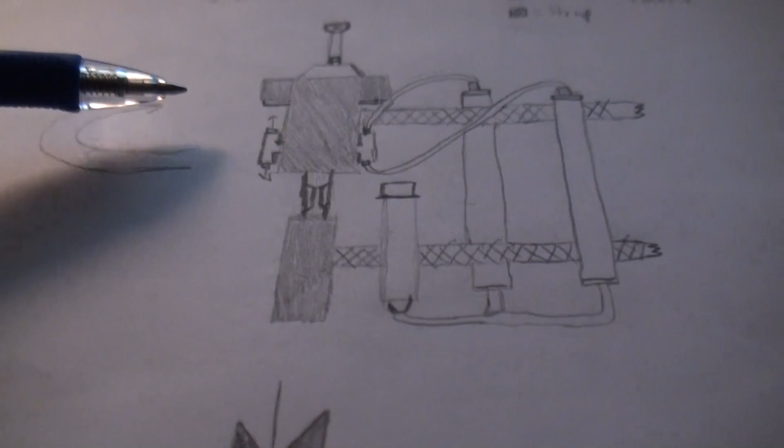So WDM 4.1 was basically just the fixed version of the WDM3, which is the one with the flask pressure vessel that I showed in the previous video I made on the web shooter, the actual physical one. That was called a small web shooter update, I think. But that was sort of the updated version of that.

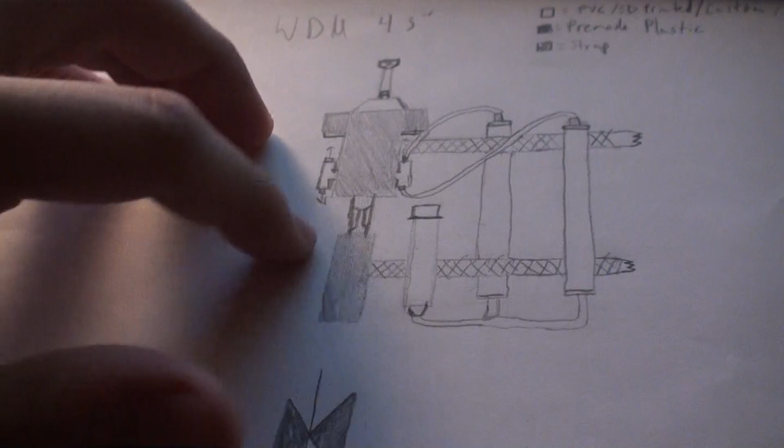WDM 4.2 was basically this main unit with these two parts here plugged, but then you would have one CO2 canister coming out of here with the fluid on top of it. So you'd have fluid, CO2, plug, plug, and then it would go up and shoot out. But that was very low fluid capacity, so I decided to go with this.

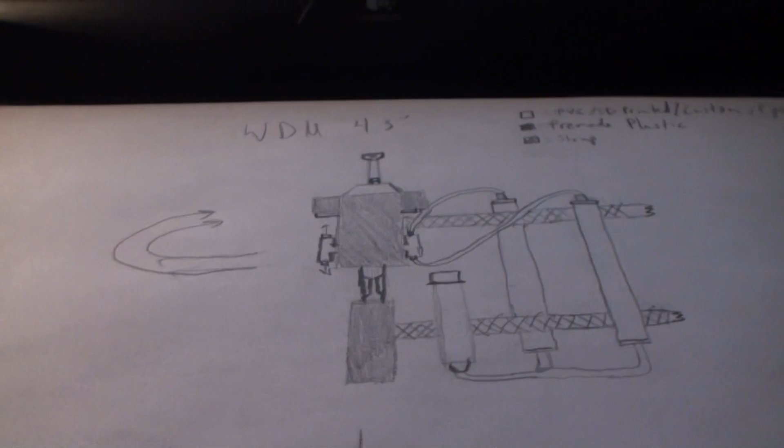This originally started out as a Scarlet Spider sort of thing, and it evolved away from that, and then evolved back into it, and now it's sort of in between a realistic and a Scarlet Spider design.

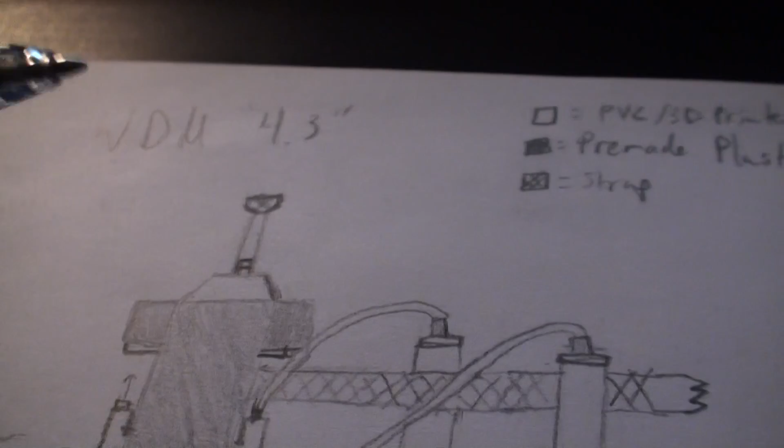So let's go over the different parts, just primarily what I need to and don't need to explain. So right here is the trigger, the wires, and the nozzle. I'm pretty sure they don't really need any introduction. The trigger is just a button, the nozzle is probably a barb fitting for the output.

This trapezoid here is just an extension that I'll have to build or 3D print for the main unit. This right here is what I call the main unit, and that's where the formula combination and the actual chemistry stuff happens. I'll show you the inner workings of this a little bit later.

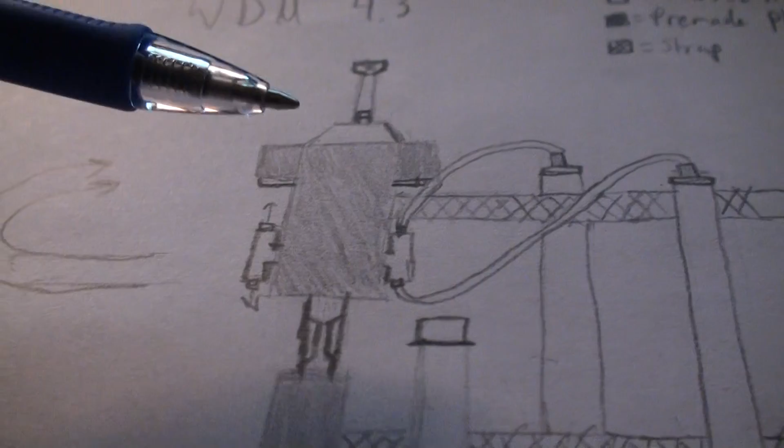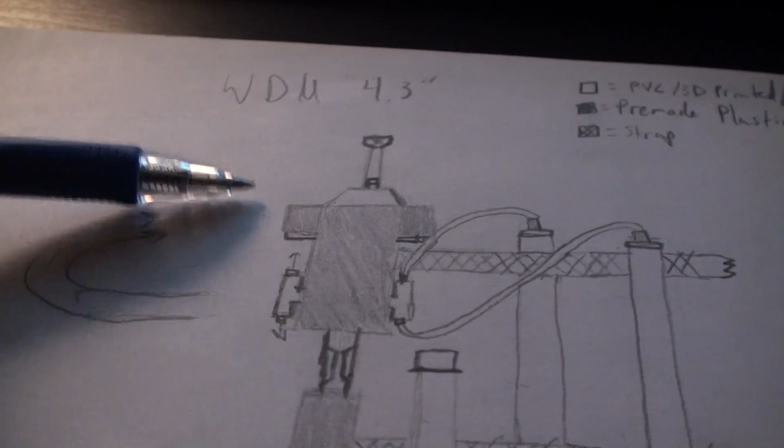It's on a separate page, but basically you can see there's two solenoids. I know we talked about the singular solenoid, but after I saw the issue with the one you sent me before, I started looking for some other ones and I could not find any. I think you said you couldn't find any either, so that would be an issue with the singular solenoid. I'm probably just going to end up using two.

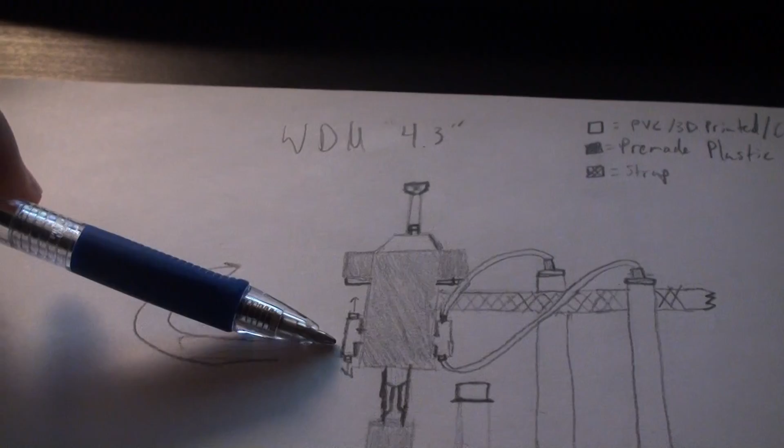But down here you have the two T pieces that come out of each side of this, and the point of these is to allow for two pressure vessels to go into it so that we can have more fluid capacity.

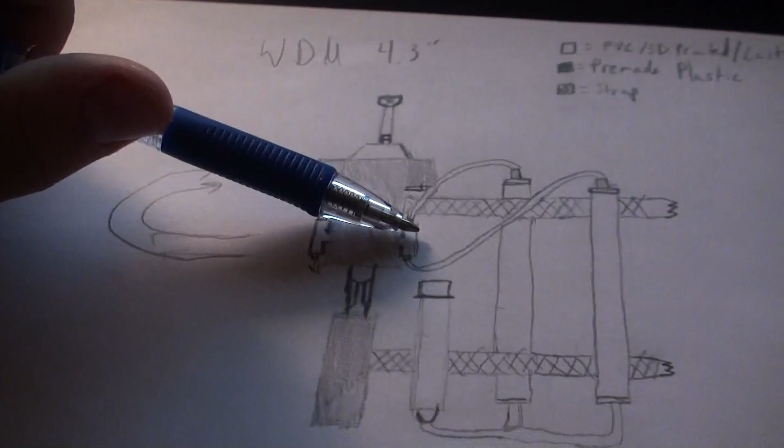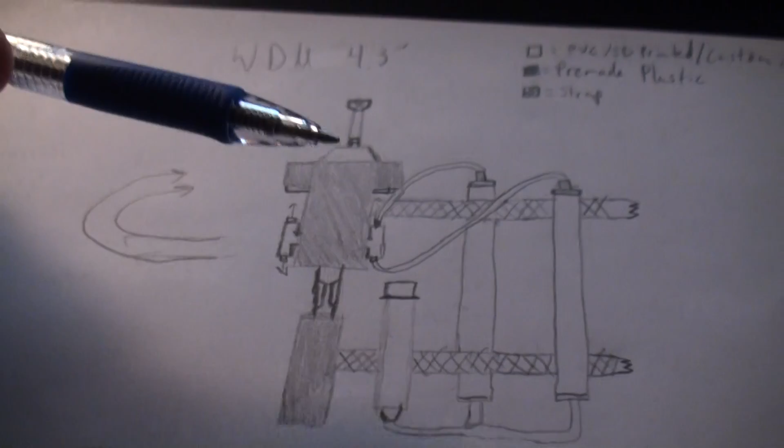Now the problem here that I originally had was that each of these was a cross piece, so there would be one more input here with one more pressure vessel. That was before I had this secondary unit here. So I had to condense the amount of fluid because I had to add this extra unit here, since these CO2 canisters were directly below this. But I had to move it over, which made it so there was less actual space for fluid.

But all of this in here is where the chemistry stuff happens and the final release of the fluid.

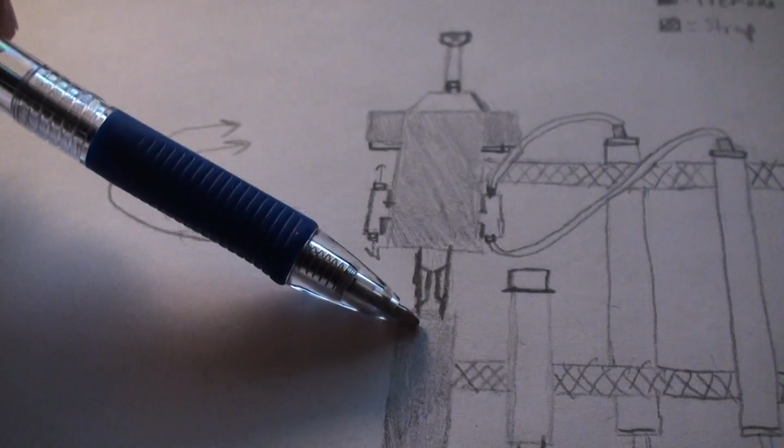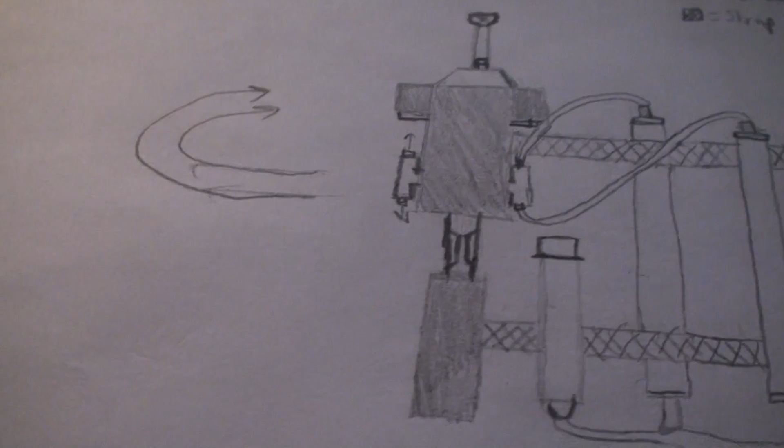Right here is basically a ribbon cable. I don't really know what I'm going to use. It's probably just going to end up being all the wires and such put into some heat shrink tubing. I wanted to do a ribbon cable, but then I realized that would probably be very high resistance and very low strength. So down here is where the batteries are going to go.

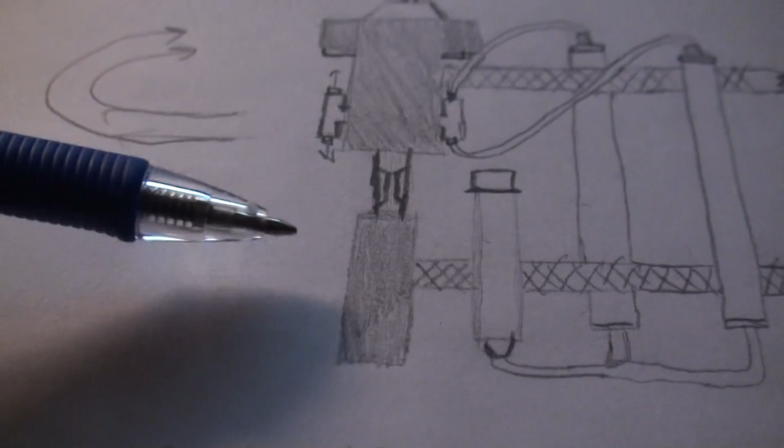Since we don't really know about the heating part yet, I will probably just be using the two 9 volts. As you can see, I have two rechargeable 9 volts here. They probably end up like this, since you have to have a clip for both of them. Now the problem here is that this is the length of the main unit, and you can see the problem - it's a bit longer, even.

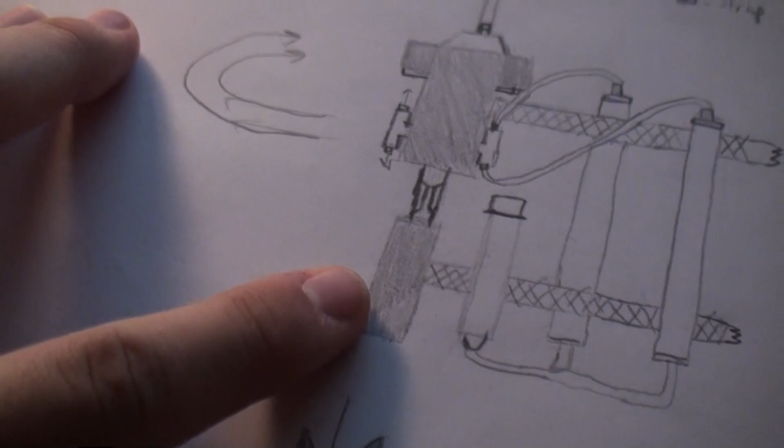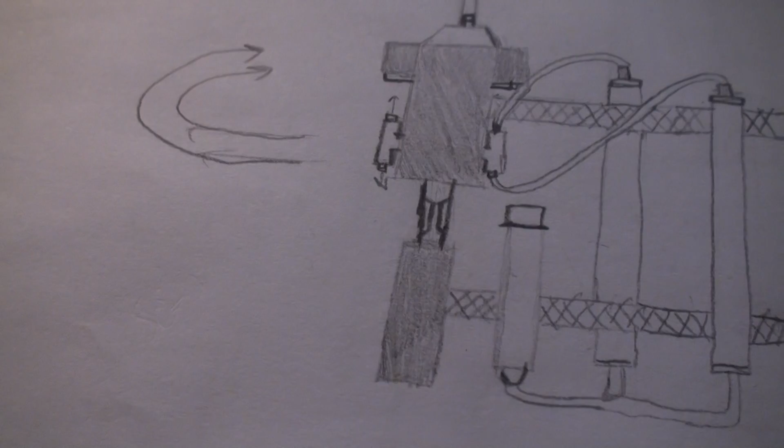Plus then, if we do the heating coils, we'll have to have more batteries down here, the small 12-volt ones, one or two, depending on the amount of nichrome or whatever wire we use for that. So I don't really know what I'm going to build for that. Plus, I'm going against using the new circuit for it - I'm probably just going to go back to using the microcontroller because of space.

So next, you see these sort of X parts here - that's just the nylon straps. What I wanted to do was take the nylon straps and weave them around the pressure vessels. So this right here is the CO2 adapter.

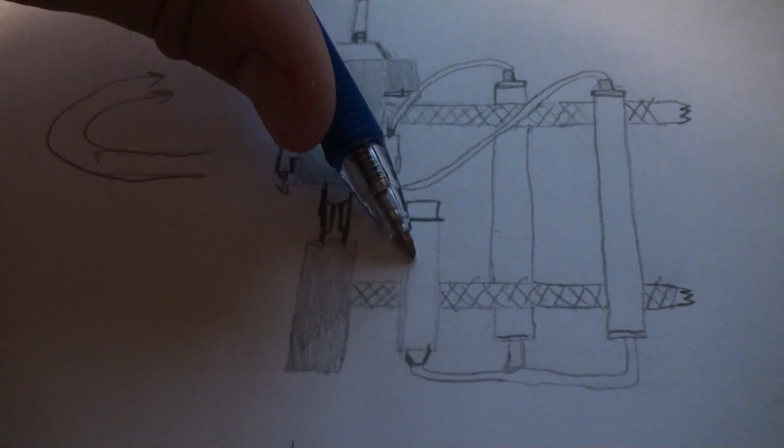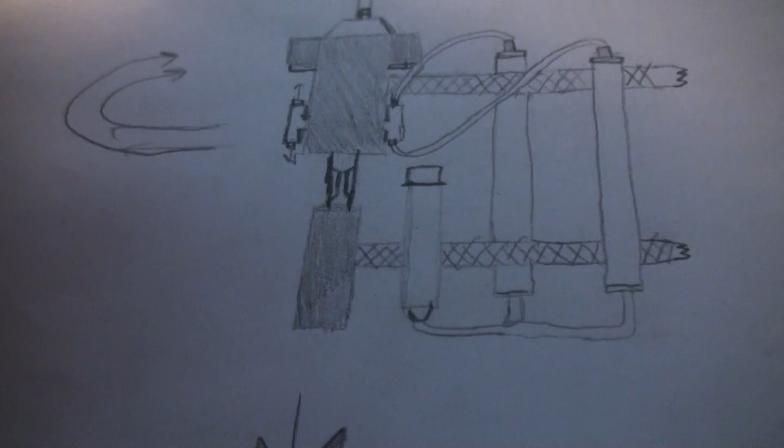This originally, like you saw in the previous video with the Smalltalks 3, this valve was manually actuated, and I've already built this adapter. I want to rebuild the adapter and modify the valve so it won't have to be manually actuated, so whenever there's CO2 connected, it can constantly shoot CO2 into the bottom of the canisters. Plus I got better caps and screw pieces, so I want to make the adapters a bit better. So the CO2, when connected, is constantly shooting into the bottom of these pressure vessels.

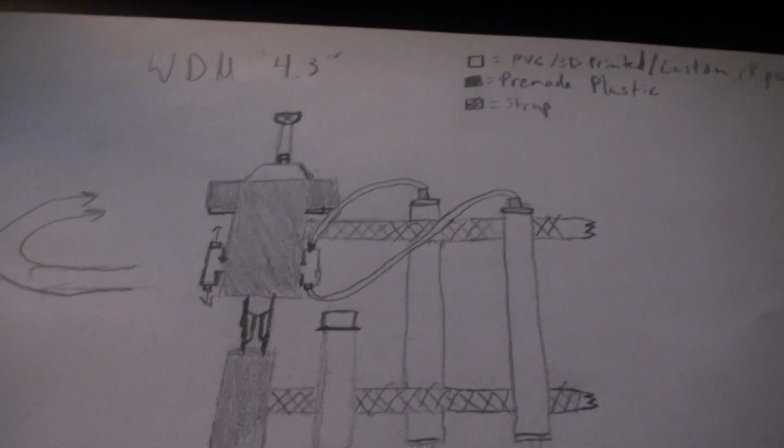And these operate on the GPM, like I said in the Smalltalks episode, and it's going to work just like that - just like you would expect.

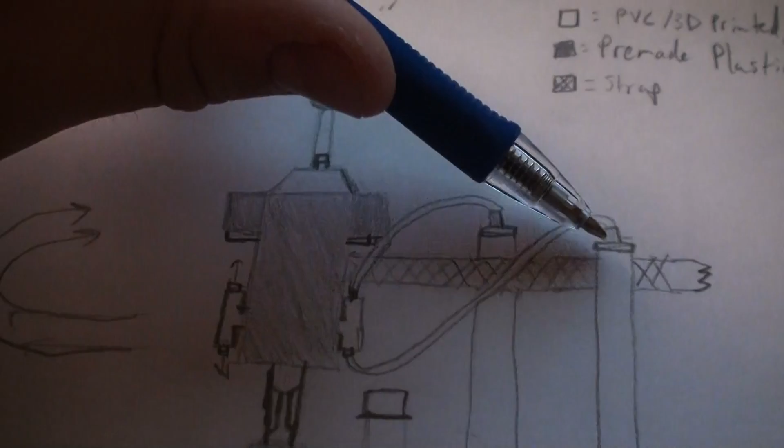Now you can see up here I have these two pieces - these threaded pieces that lead into the tubing that goes into the T. Now you can see I don't have that down here. The problem was that this was basically a closed loop with threaded pieces, which can't work, because if you're going to unscrew it, you'd basically have to turn the pressure vessel, but you can't turn it two ways at once.

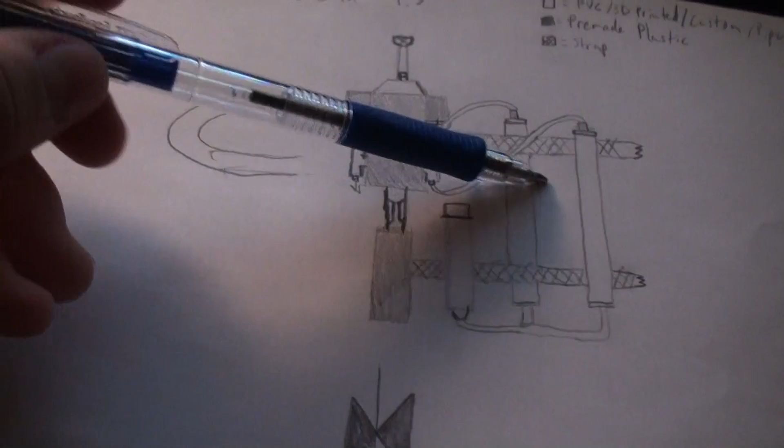If both of these were pointing in opposite directions, if I was turning the pressure vessel to try and loosen it just in one way, this side would be loosening, but this side would be tightening because they're pointing in different directions.

So the only way to solve that was to make it so the CO2 injector was permanently connected rather than removable, and the part where the fluid exits, or where I would refill it, is up here and is able to be taken away.

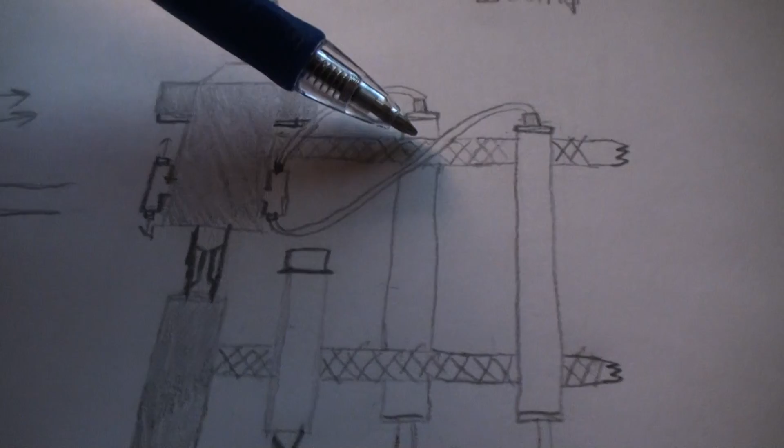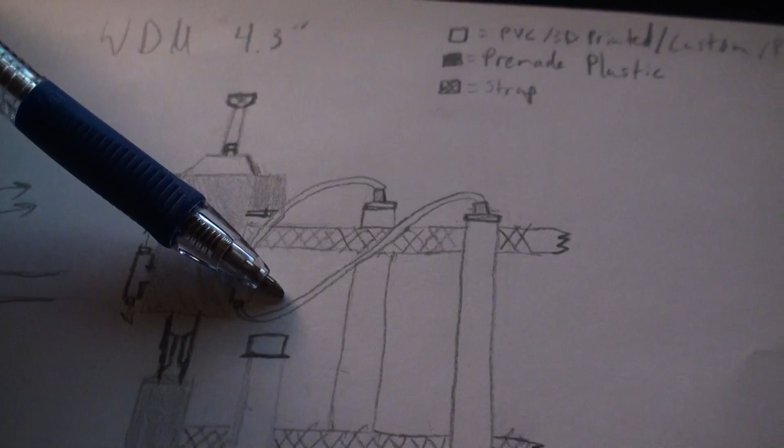But the only way to do that would be to unscrew this part, which would twist the tubing itself, which is somewhat a problem because that can mess with the integrity of the tubing, but hopefully it shouldn't be too bad.

Oh man. So this is basically going to be symmetrical. If you looked at it, how could I say this, if you sort of unwrapped it as it was on the forearm, it would be basically this, symmetrical.

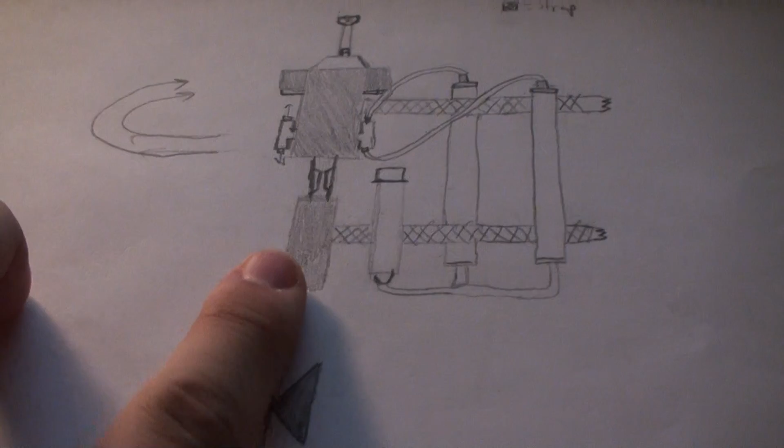Only if you were to actually lay it out, since the buckles would be on the bottom here and here, it would go CO2, then water cartridge, spirit gum cartridge, CO2 cartridge, so that when you wrapped it around the arm, it would look symmetrical.

So that's the basic workings of that - now you know everything about the tubing and all that.

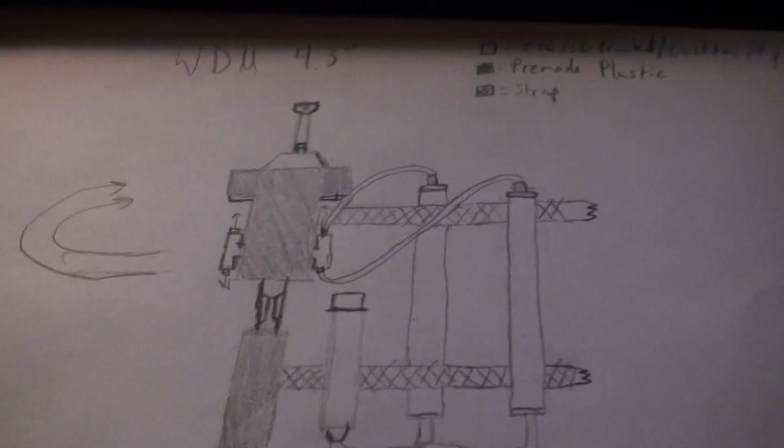So the workings of the inner main unit are as follows. Here's where the spirit gum would come in, and here's where the PVA would come in, or rather just the water or whatever water-based solution we have.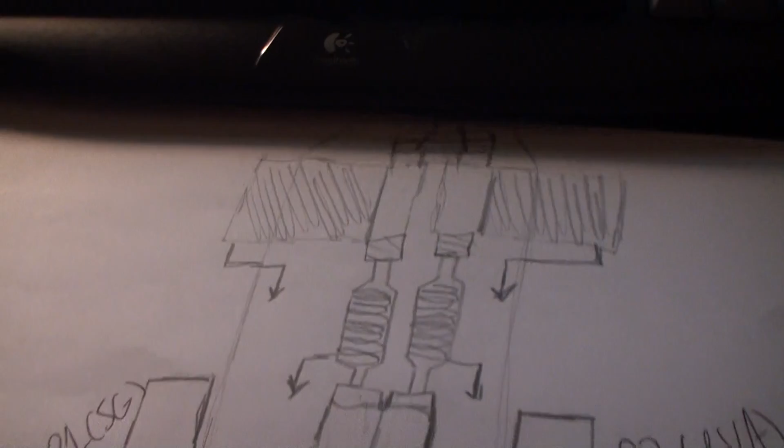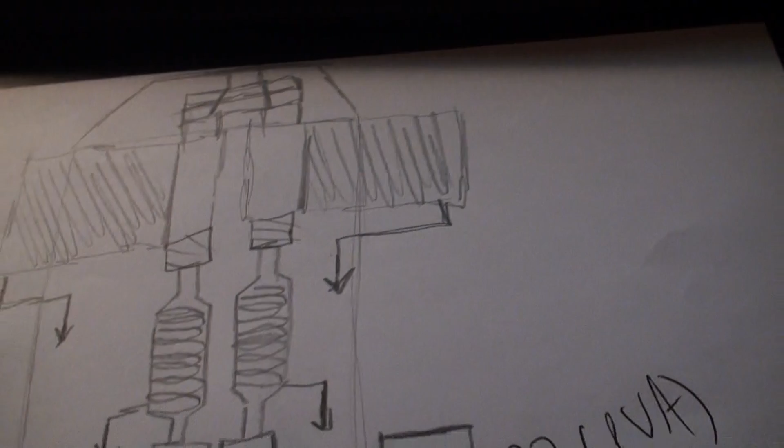Each of these T pieces and each of the solenoids only controls one ingredient. The only time they ever come together is up here after they come out of the solenoids into the spinneret. The only problem is there might be clogging on the spinneret, but at some point there will be a combination of the two formula ingredients, and inherently there will be some clogging possibility.

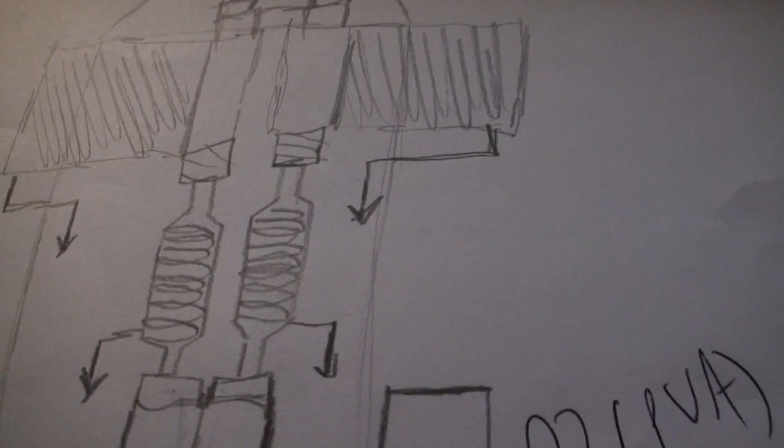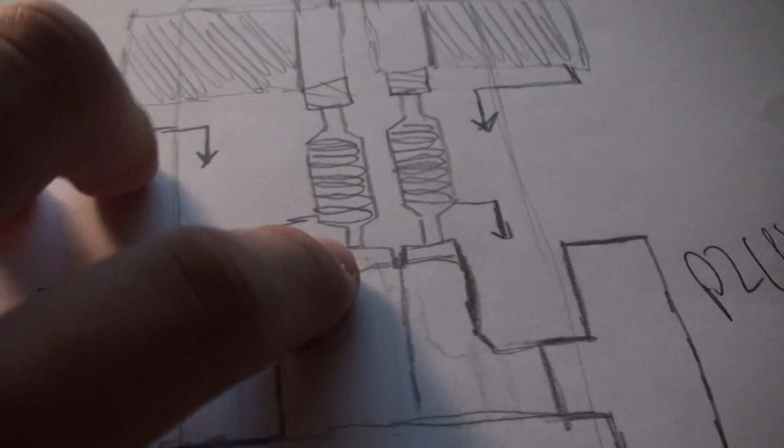So I wanted to make it as late as possible for them to combine. Let's follow the path of spirit gum on the left here, since it's basically just mirrored for the PVA. So it comes in here, up through this elbow piece, and then right here I have a small threaded nipple piece that's glued into this heating coil here.

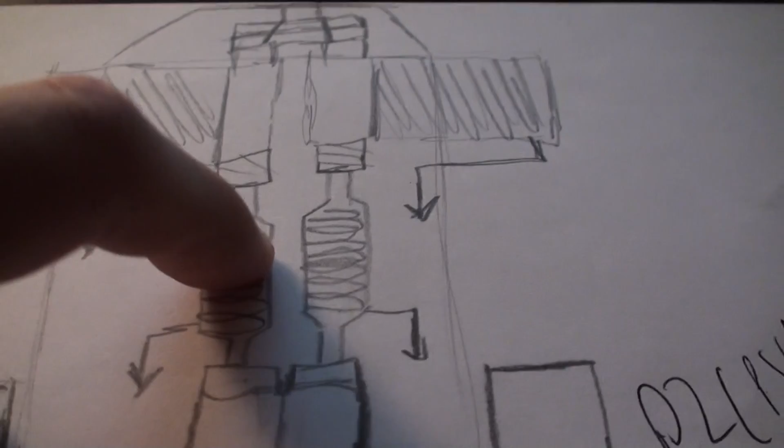The wires for the heating coil come down here, but you also have the copper tubing, coiled up like that. So the fluid comes in here, comes up into the coil, spins around, comes up into another threaded piece, goes into the solenoid, which closes it off until it's opened up, goes up into the spinneret, and goes out.

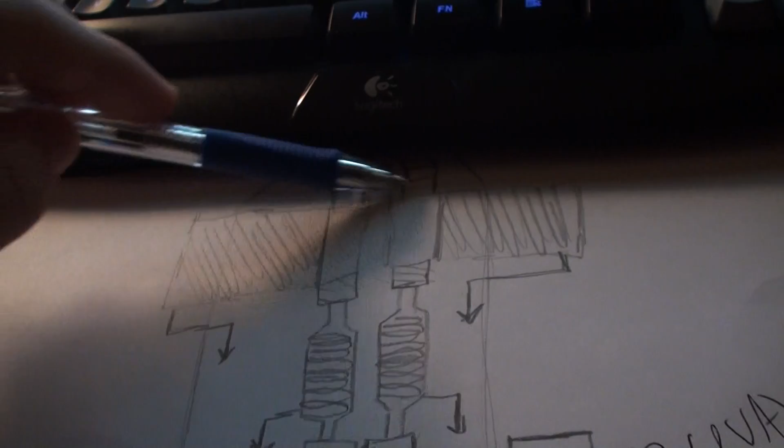So what are the issues with the inner unit? Well, the main issue is, once again, the spinneret being a singular point where they're combined, just like the T's themselves, is a closed loop.

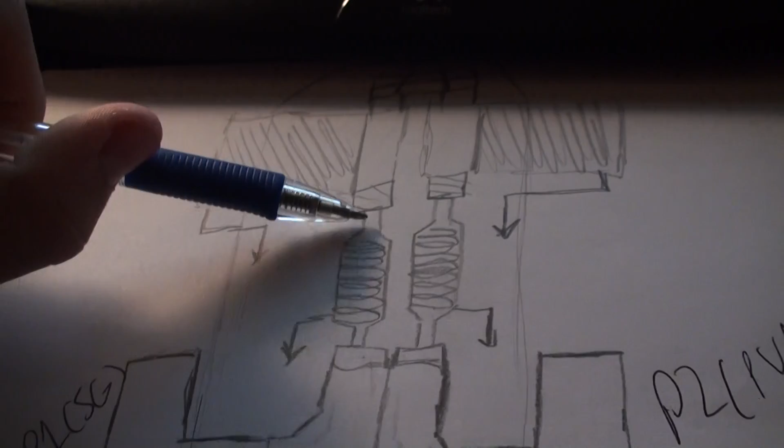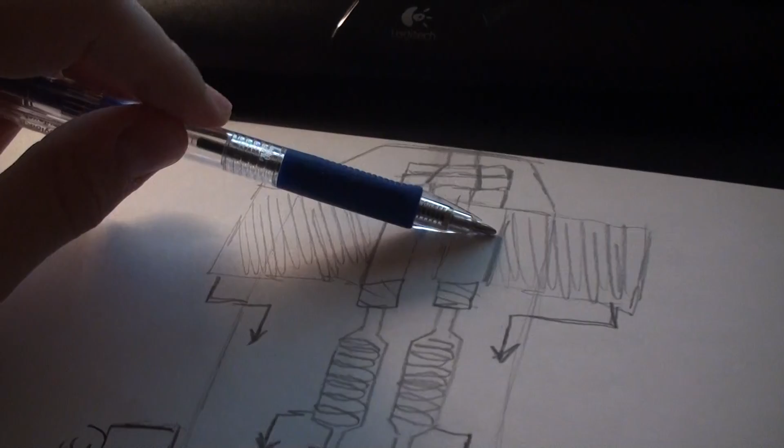So basically what I'd have to do is screw the threaded piece in here, screw the threaded piece in here, take the spinneret, have it have two threaded openings, take a nipple with a hex nut piece in the middle, which exists, and screw it in there, unscrew it slightly, screw the solenoid on, screw one of them on, disassemble this solenoid, screw it on so it can rotate and not hit the other one, reassemble it, screw in this threaded piece here, screw in this part here so it comes together.

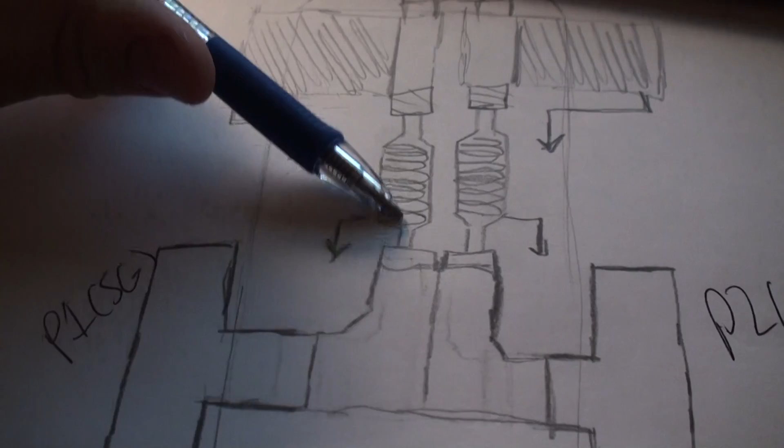Have both of these threaded pieces here, insert the heating coils, glue it in, screw this threaded piece and this threaded piece into the elbow pieces, and then enclose it and glue it - or epoxy it or some adhesive. That's going to be a hassle, but that's really the only way to do it.

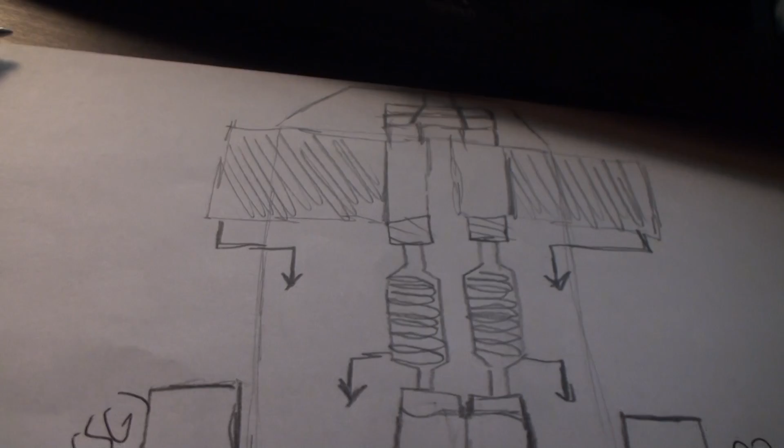So that is the basic workings of the shooter. If there are any obvious problems or if you have any questions, once again just let me know as usual in email.